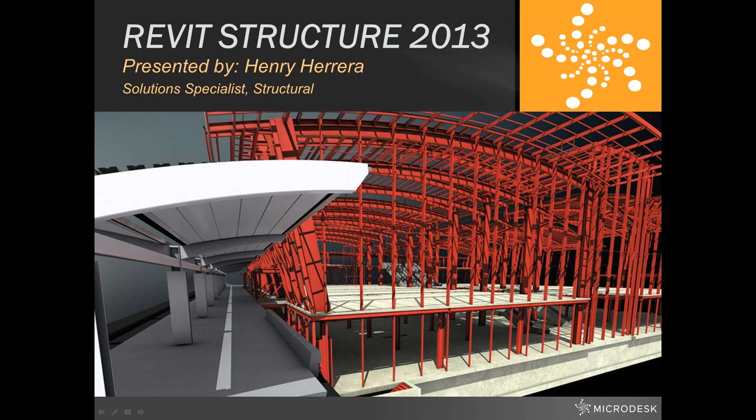The key features can be broken down into three main categories: Revit Rebar enhancements, analytical modeling improvements, and interoperability and collaboration tools. The integration of the Autodesk 360 Cloud is also a tremendous update where tasks can be performed over the cloud, such as energy analysis, rendering, and structural analysis.

I will now go over some of the Rebar enhancements that will be beneficial for design and documentation.

For 2013, area and path reinforcement has been updated with a new behavior that makes these elements function similar to beam systems and structural framing. The existing behaviors of area and path reinforcement have been maintained. The creation of these elements stays unchanged, each created using the same sketch editors, with the same symbols and tags remaining.

The main difference is that the structural rebar elements will appear on the floor or wall and can be properly scheduled. Rebar sets will be created when possible, and individual bars will be created when sets cannot be defined, for example along an arc. Welded wire fabric has also been integrated into Revit Structure 2013 and can be modeled and scheduled in the same way as path and area reinforcement.

Let's now take a look at some of the updates pertaining to analytical modeling within Revit Structure 2013. In this release, you can find many enhancements to help create and manage the structural analytical model, such as better visibility and greater control over the analytical model.

Analytical floors and analytical foundation slabs now have corner nodes in analytical edit mode. If you select the analytical model, you will see controls posted at all corners and edges, which allow direct manipulation of the analytical model. You may select individual edges by using the Tab key while hovering over an edge.

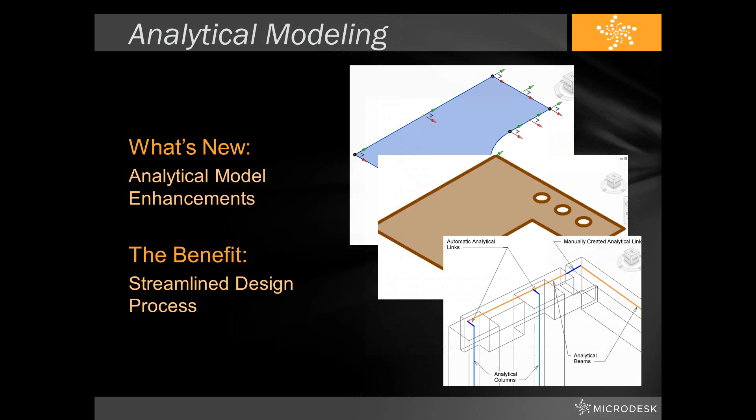As mentioned previously, for the first time, you now have the ability to bring Revit files directly into Navisworks. You no longer have to spend time exporting the file to Navisworks, and you also don't have to spend time breaking your file out by levels, which in the past has been the best practice to better separate the models so that selection sets were easier to create.

Now, because they have incorporated the Revit hierarchy into Navisworks, you can also select objects in Navisworks by level, family type, object, and material, straight from the selection tree. These functions alone will save you time and headaches when coordinating between multiple models and disciplines, allowing more organization and less time thinking about how to organize the model before it goes into Navisworks.

Autodesk 360 provides users with various tools to be performed on the cloud. We will specifically demo the Autodesk 360 structural analysis tool to give insight into how this may be beneficial for design and documentation.

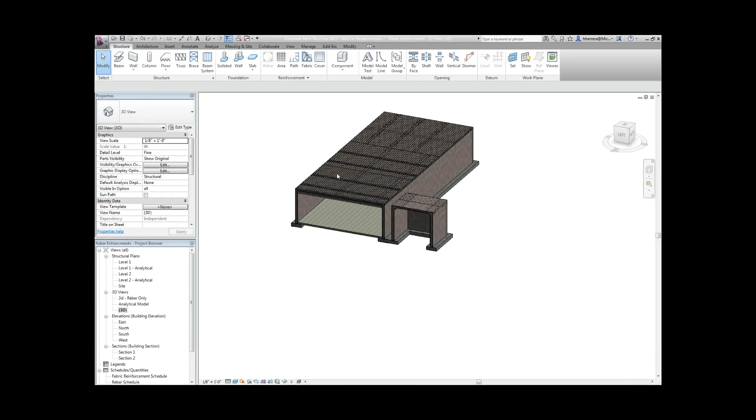I'm going to go ahead and demo some of the features that I just spoke about on the PowerPoint presentation. Like mentioned previously, one of the major updates to Revit Structure 2013 was the development of welded wire fabric within concrete elements. As you can see from this model, I have defined multiple areas where I was intending to model welded wire fabric inside a structural concrete slab.

The tool works very similar to the area reinforcement tool and has actually been added to the reinforcement panel on the ribbon. Going to a plan view, we can see the extent of the fabric sheets as well as their overlaps to adjacent sheets.

Just like the majority of other modeled elements in Revit Structure, the welded wire fabric can also be scheduled. Schedules can be set up with whichever parameters are necessary for your intended design. We'll take a look at what a typical schedule for welded wire fabric may look like for your design.

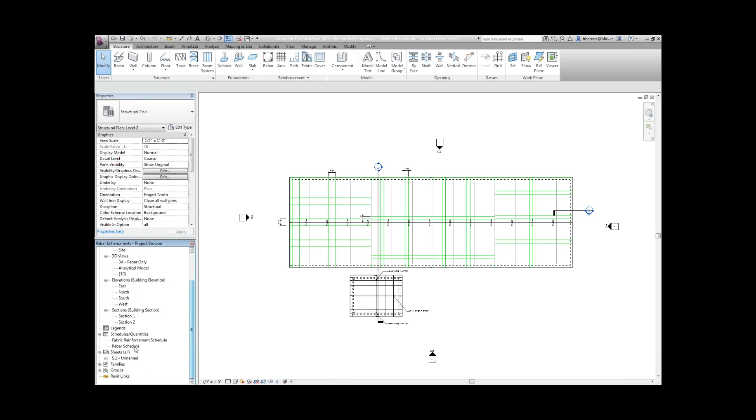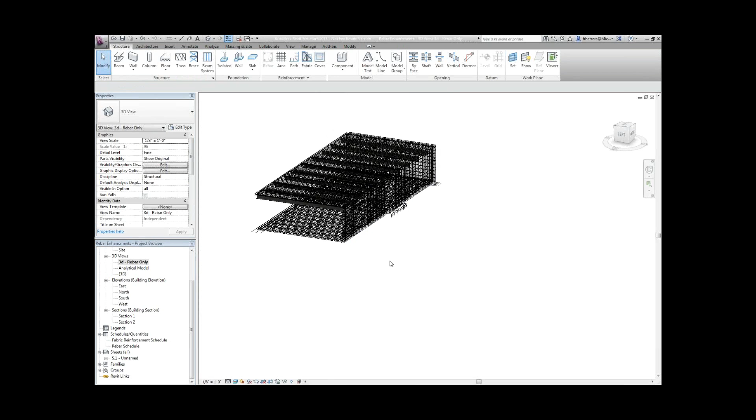Another great feature we spoke about earlier is the enhancement to the area and path reinforcement tools. When modeling rebar within your model, these elements can now be properly scheduled and will appear as physical elements in the model, not just as drafted elements when you cut a section or detail. When I hide the concrete elements in a 3D view, we can now see all the reinforcement that is present.

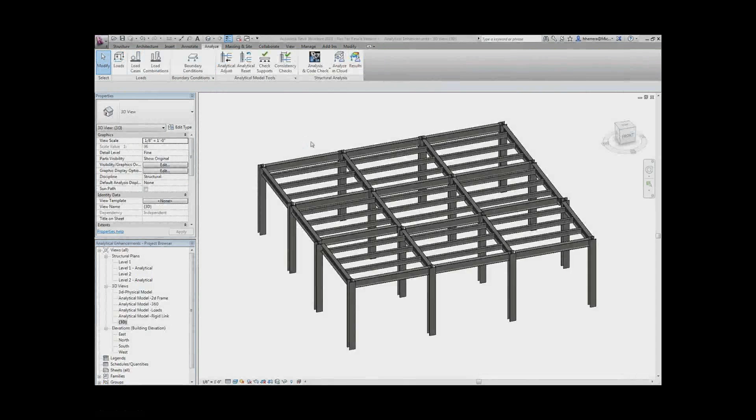There have also been major improvements to the analytical tools for Revit Structure. It is now very easy to manipulate the analytical model of a structure within Revit itself, or even add rigid links. For example, let's orient this 3D view of this steel structure to be viewed from the top. When zooming into this column, we can see that the beams frame in eccentrically to the column itself.

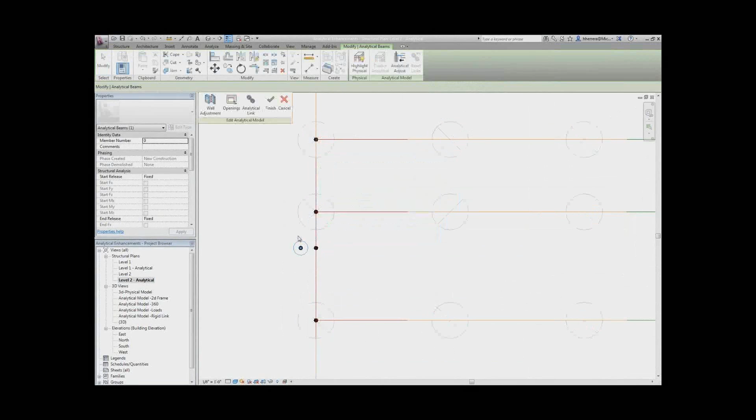When we open up an analytical plan view, we can see the stick representation of the structural elements for that specific floor. When we click the analytical stick model and click Analytical Adjust, a new pop-up window comes up, and we can easily modify portions of structural elements. In this case, I'll add an analytical link or rigid link from beam ends to column in order to model the connection eccentricity.

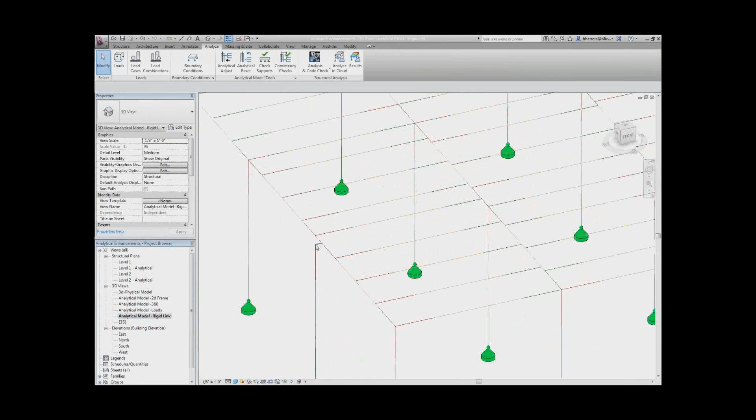If we now switch over to our 3D analytical view, we can see our rigid link connecting beams to columns. Our eccentric connection has now been modeled, and if we were to export this to an analytical software, we'd now be able to capture that eccentric load on the physical column itself.

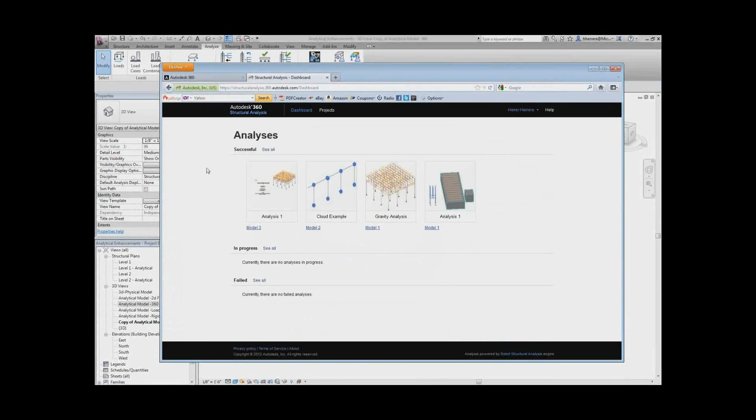With improvements to analytical modeling within Revit, Autodesk has also released a cloud-based structural analysis tool that can be extremely beneficial for structural engineers. Autodesk 360 Structural Analysis provides cloud-based structural analysis as part of the BIM process. Engineers and structural designers can extend structural analytical models to the cloud for static structural analysis. Results can then be visualized within Revit as well as on the cloud, anywhere at any time.

Preliminary analysis can be done in the cloud while design continues, minimizing the amount of work and analytical modeling during early phases of design, overall greatly enhancing the engineer's workflow process.

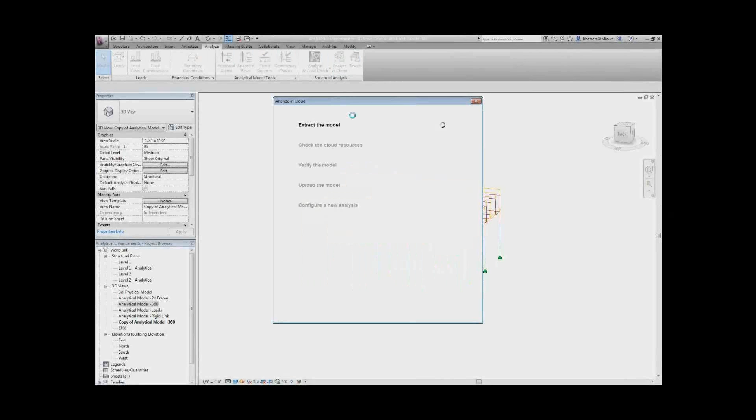By default, Revit Structure generates both physical and analytical models of structural elements, where the physical model is used for documentation and the analytical model is used for structural analysis. The analytical model generated with the physical model can have loads, load combinations, and boundary conditions defined within Revit in order to be sent to the cloud for static analysis.

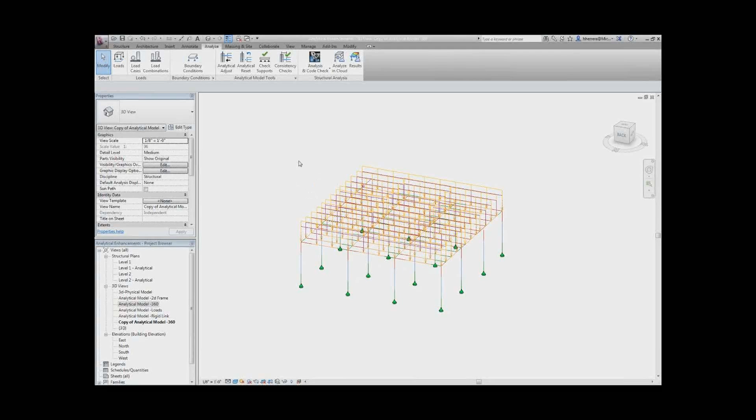During the design process, the engineer can run multiple parallel analyses at the same time while work is being done for documentation and production by using the power of the cloud. This will ultimately increase productivity, since the engineer or designer may be interested in a few specific locations as well as the entire structure for the overall structural design.

Structural analysis via the cloud makes structural design more accessible, allowing analysis to be performed anywhere or at any time, as long as the analytical model has been uploaded to Autodesk 360. Traditionally, conducting structural analysis is time-intensive and requires extensive computing power.

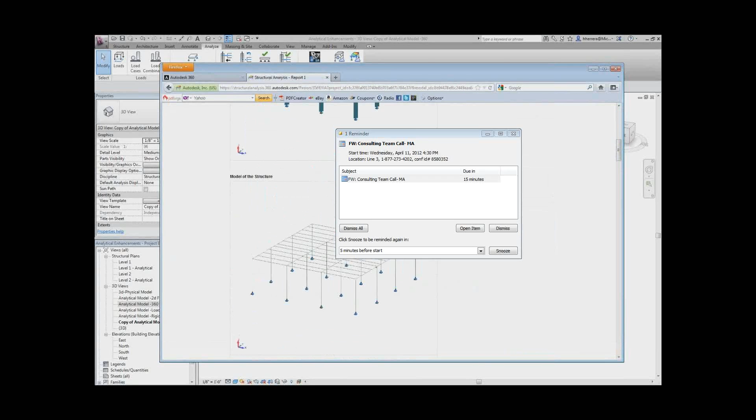However, with Autodesk 360 Structural Analysis... Henry, sorry to interrupt, you have a little reminder on your screen that's blocking our view. Would you mind checking that out? Sorry about that. No problem.

Thanks, it's okay. Traditionally, conducting structural analysis is time-intensive, requiring extensive computing power. However, with Autodesk 360 Structural Analysis, a designer or engineer can continue their design in Revit while their analysis is performed on the cloud. Autodesk 360 Structural Analysis allows a structural engineer's workflow to be streamlined within the platform-independent analysis environment.

Being able to perform analysis via the cloud allows structural analysis to be performed early and as often as needed, especially when the design may change over time or have multiple iterations. Autodesk 360 Structural Analysis complements the structural engineer by integrating multiple structural analyses into the BIM process. Design decisions can be made early during the design process, which could ultimately save time and cost.

And we can see here on my model that I have gathered results from the cloud. This can be done at any time, and the results can be displayed either in Revit or on the cloud itself. Right now we can see the cloud results, and in a second we can see what it would look like inside Revit itself.

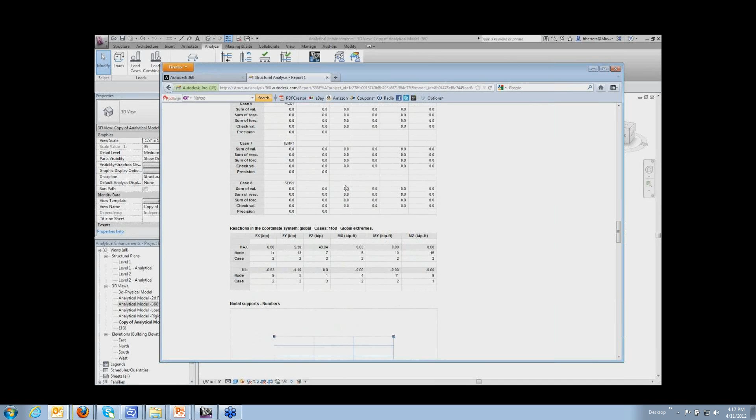You can see that there's multiple different types of analysis within the cloud, such as nodal displacements, member displacements, forces in members, reactions of columns and beams as well.

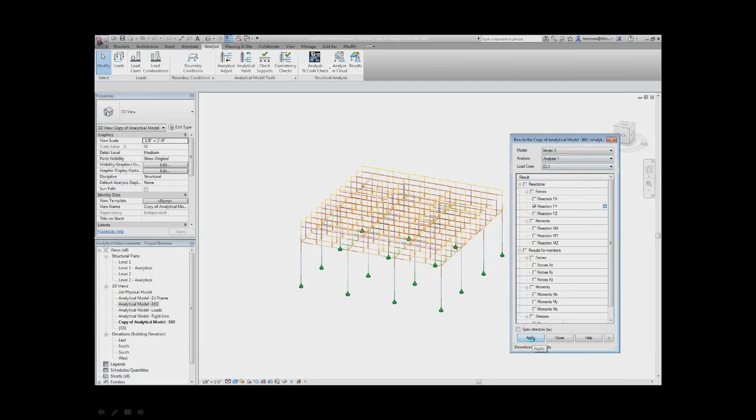Here's how you would gather the results from the cloud within Revit itself, and you could display whichever reactions or results you're interested in. In this case, I'm going to look at column reactions at the base. Just click Apply, and within a few seconds all your reactions will pop up, and you'll be able to get an idea of what's going on with your structure.

So to recap what we've seen today, there have been major updates to design and documentation, as well as analytical modeling, integration with Navisworks, and structural usage via the cloud.